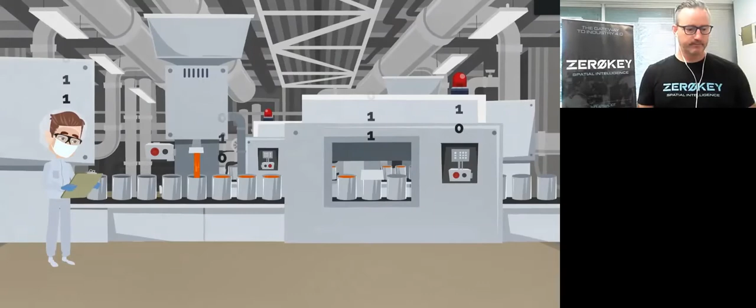Introducing Smart Space technology from ZeroKey. Modern factories and logistics centers are getting smarter, but human factors still plague these environments, causing expensive downtime, reduced production yield, and ballooning overhead. Smart Space is a breakthrough product that unlocks unprecedented insight and digitization of industrial operations of any scale.

Patented 3D localization technology from ZeroKey digitizes manual workflows and processes down to the millimeter, so you can identify process bottlenecks, automatically detect errors in real time, optimize processes with powerful analytics and digital twinning, and improve safety in dangerous environments.

So how does Smart Space work? Essentially, what we're doing is enabling digitization, measurement, and data gathering in industrial environments like warehouses and manufacturing facilities. We install anchor nodes into the environment. We put trackables on anything from an AGV to a forklift to an individual pallet, whatever it may be, and we start tracking. The anchor nodes get positioned in the environment somewhere between 30 to 40 meters apart.

Once those are put into place, they actually go through a self-calibration where they find the nodes that are in close proximity to one another. The whole network ends up becoming a mesh network, so we can start to build from room scale to multiple room scale to multiple level scale, whatever a client needs to do. And it all meshes together seamlessly at the end.

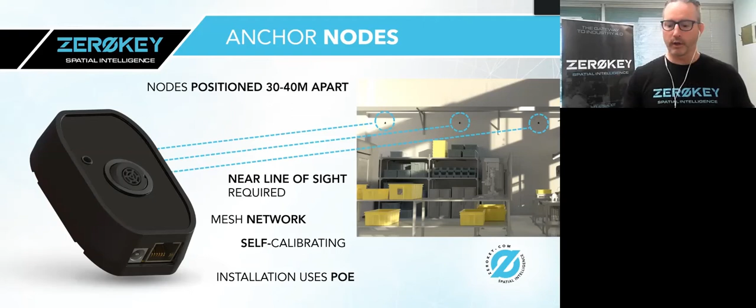At the end of the day, the core technology in each one of these nodes is going to be the same core technology. Once those nodes are on an item in the environment being tracked, we get real-time 3D tracking at the millimeter level. Each one of these nodes is uniquely identifiable, so depending on how a client wants to track whatever is being tracked, we can make sure that the back end is able to annotate that node to the right thing, whether it's a SKU, an employee number, whatever it may be.

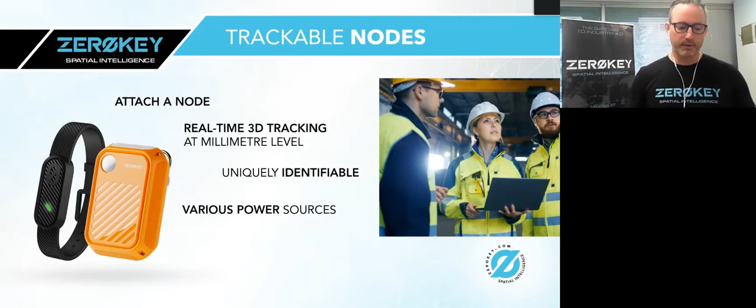When it comes to the system architecture, it's really quite simple. We install the nodes into the room, multiple rooms, or building, whatever it is we're tracking within. The sensors or trackables go onto whatever that may be - power tool, person, pallet, part, anything you like. The data collection comes through power over Ethernet, transferring that information back to whatever source we want to use for data collection. And then there's the output of data.

The technology for data collection can be an on-premise solution or a cloud solution, and that's driven by client desire and client need. We don't have a requirement to tap into Wi-Fi, or local LTE, 5G network, whatever may be installed in newer buildings - we don't need that. The PoE is going to be able to get that information to where we need it to go.

When it comes to how the information flows and who is going to aggregate it, there are two options. We can provide that to a client in a raw dump of information, or we can actually aggregate it and provide it out as a dashboard with some intelligent insights for clients to work with and build for the future.

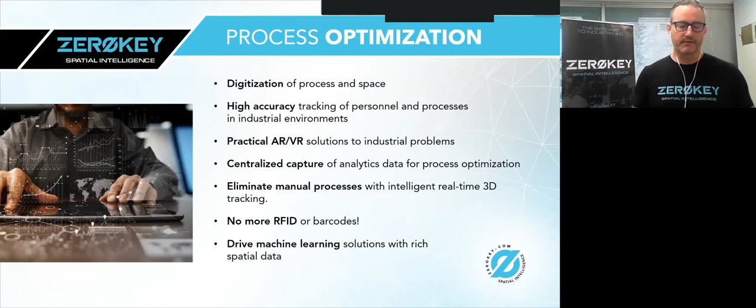When it comes to actionable insights, this is something we can provide as a raw dump of data for a client, or we can dashboard it to provide customized output. It can be on-premise or cloud-based—we're agnostic when it comes to that, very much up to the client. It's really all about providing insights so a client can understand what could be changed, what can be changed, how things can be changed, because we can track things in a way that hasn't been possible in the past.

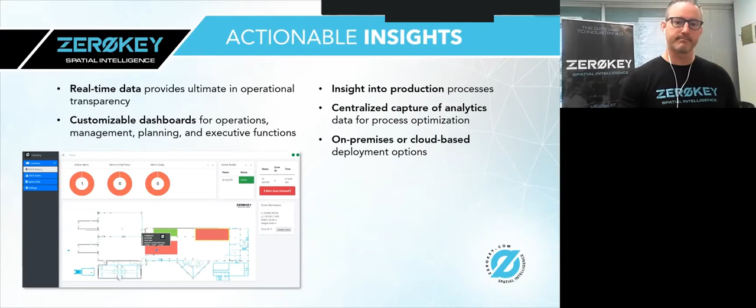Here's a little video of one of our workbench installations.

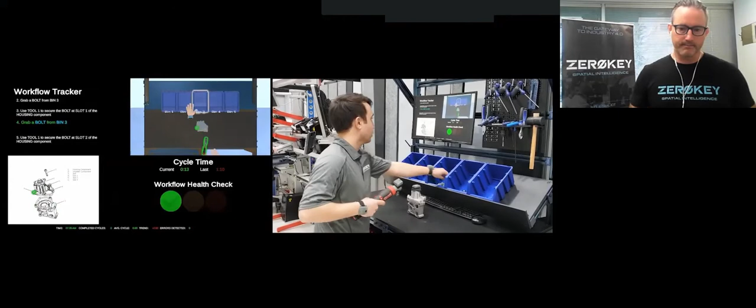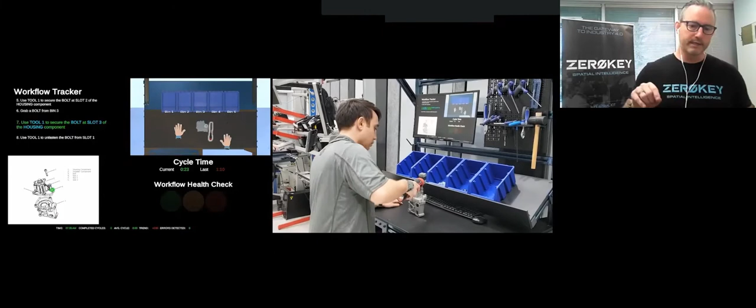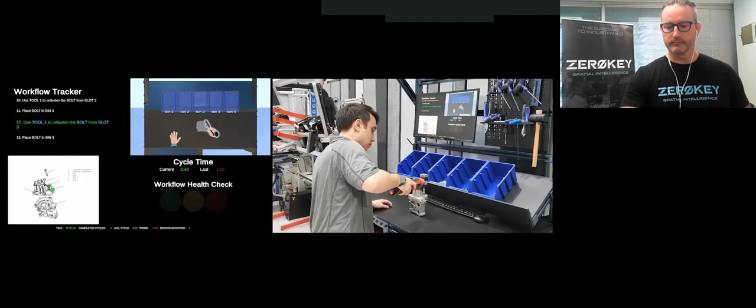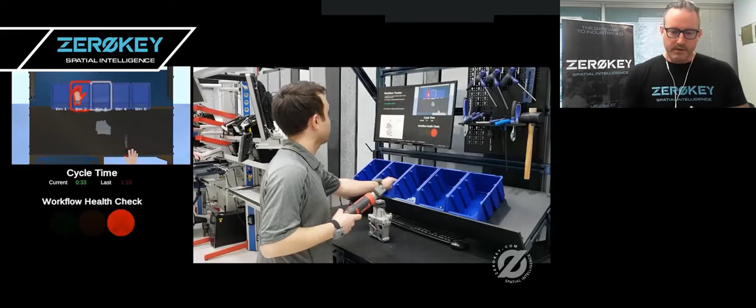As you can see, every time Kyle does something accurately, a green light lights up. Right now, he's being tracked on what order he's putting in the torquing of the bolts. Oops, he made an error, so it flashes red. So just got a couple of screenshots from that. As mentioned, when Kyle made that error, it flashed red, so he's getting real-time feedback on what's happening.

I'll give you a quick layout of what's happening in this video. We're using our dev kit to do this. Kyle's wearing a wristband on each wrist, so we're tracking his hand movements. We're tracking the torque wrench in his right hand—there's a node on the end of it. We've built an offset, understanding how long the bit is, to know when he's actually on the bolt.

The trigger of that torque wrench is triggering the sensor, so we know when it's going through the process accurately. On the screen he's looking at, he's getting a written workflow of what he should be doing, along with an image diagram highlighting things—you can see the bolts turn green when it's their turn to be torqued onto the pump housing. We have our anchor nodes for the dev kit around the top of the workbench to track all of those movements and understand what's going on.

The green, amber, and red lights that pop up on the board essentially tell him in real time: are you doing the right thing? Did you make an error?

This is something we apply to many different spaces, but one of the big areas is a moving manufacturing line. If something is moving down a line and an error moves down that line, that can become a very costly error. If you can capture it right away and make that adjustment in near real time, there's a lot of savings that can come through to a client.

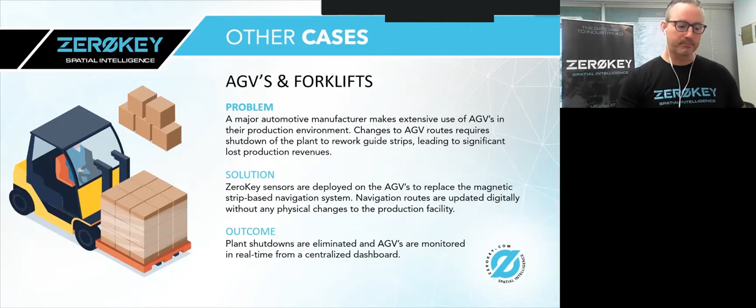Just to jump into what the pricing looks like for our solution, our development kit, which I mentioned, is $5,000, and if you go out to our website, you can submit to get a quote sent out. Essentially, it comes with 6 anchors, 2 trackers, and the dongle, which allows you to connect to a tablet or a computer to access our SDK. This is designed for smaller use cases. So these nodes are really going to max out at about 6 meters apart. Once you get beyond that, you're going to be compromising the millimeter level accuracy. You can do it, but you will pay a little price for that. And we recommend, if it's a small enough room, a square, but a U shape is quite often the most efficient that we find for people to set up their use case testing.

For the smart space technology as a whole, when we're looking at large scale installations, we work with a hardware as a service solution. So for facilities that are 50,000 square feet and larger, we work at $2 per square foot, and that gets you our anchor nodes in place and our software all set up. It's going to provide you with support and whatever else you need on the term contract that we set up. And the only additional thing you require on top of that would be trackables. Trackables depend on the form factor, what you're trying to achieve, and how many you require. So that's the only add-on.

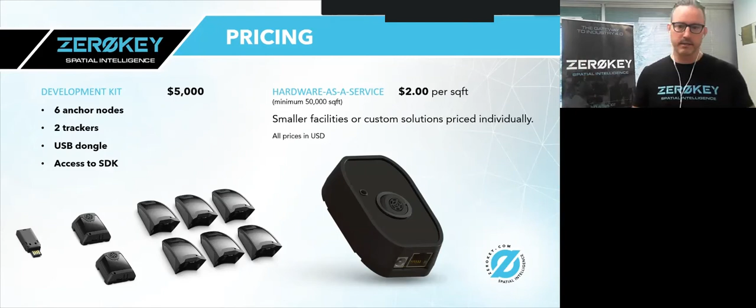Just a couple of highlights of things that have been exciting for us over the last 12 months-ish. We were really excited to be included in Gartner's Cool Vendors list back in, I guess that was May. It seems like it was yesterday. It was pretty exciting to be called out as a cool vendor, and basically a cool vendor to Gartner is an exciting emerging technology coming into a space, and we're in location services. Back in June last year, we won the machine demo competition at Collision in Toronto. That was again a really exciting opportunity for us. And then in January of this year, we were called out in Gartner's Magic Quadrant for indoor location services.

The really exciting thing here is that we don't actually qualify to make it onto the Magic Quadrant. We're too young of a company, but we got called out as a vendor to consider in a short list because Gartner sees what we're doing in the marketplace and really thinks that there's an exciting opportunity for us to grow and grow.